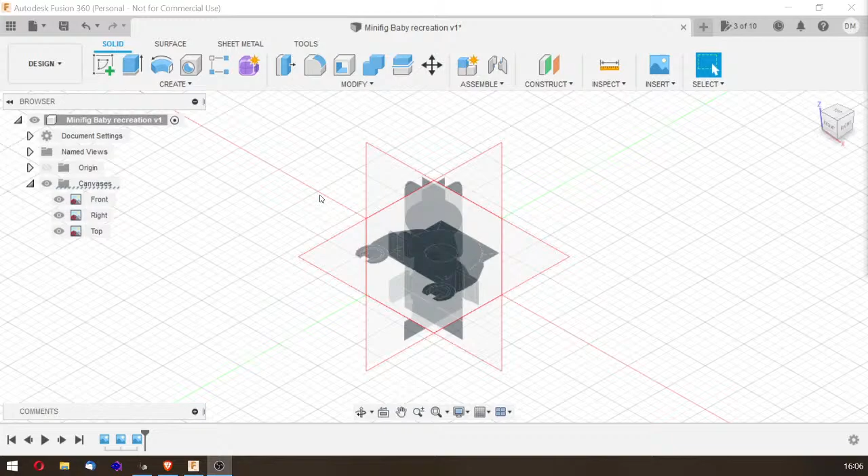I've opened up Fusion 360 and I've set up the workspace to have 3 canvases. The first canvas is the minifigure baby from the front, then one from the left or right side, and one from the top view. These pictures were taken from LDraw, which is an old school program for creating Lego models. It's still around, people still use it, and I use it occasionally, but it's quite technical.

So the model for the baby was taken from LDraw, and you may have seen people design or 3D print models based on Lego objects. What I highly suspect they do is take the models from LDraw, convert them into a format you can 3D print from, and just do it like that.

Now I could do the same thing with the minifigure baby, because my ultimate goal for this is to customize them so I can create my own versions of the baby. The only challenge is that, from my experience, the models don't lend themselves very well to 3D printing, so you have to do a bit of conversion, and then worry about parts fitting as well.

So the goal of this is to create a version that I can 3D print, that I can chop and change as much as I want to, and essentially have something I can customize.

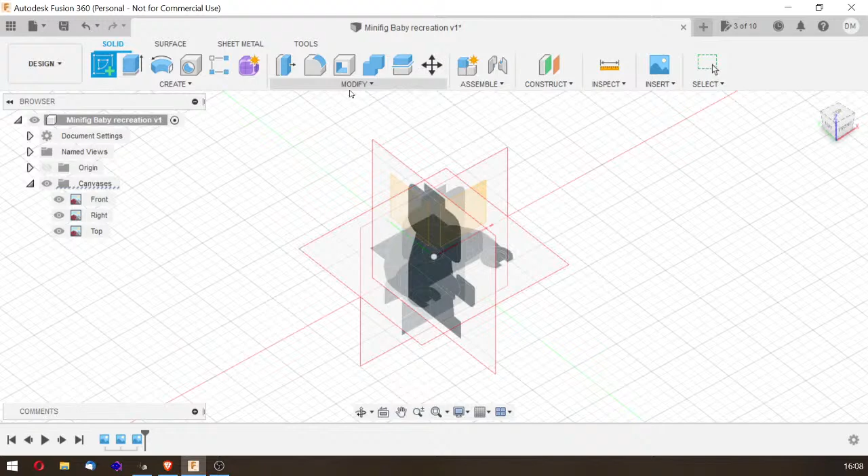So anyway, let's get started. And I have to warn you guys again, as well as being an amateur, this is going to take as long as it's going to take. So feel free to jump out if you have something else more pressing to do - I completely understand, but there's no telling how long this is going to take, because this is my first time doing this.

My strategy is to divide this in half and then mirror what I've created. So I'm going to do one half of the baby, and when I'm happy with it, I'll duplicate or mirror what I've created and go from there.

So what approach am I going to take with this? Well, my immediate thought was to start from the top and just draw a square or rectangle here. The only problem is that if we look on the right or left, we see the body has an irregular shape. So we could create a cube starting here and going up, but then we'd have to deal with the shape of the body and all its angles, etc.

So instead, if I go back a step, I'm going to create a sketch starting from the side here. This isn't a tutorial on Fusion 360, by the way, because I still don't know how to use it effectively. So what I'm going to do is just create an outline of the body, and I'll go through this and clean it up later.

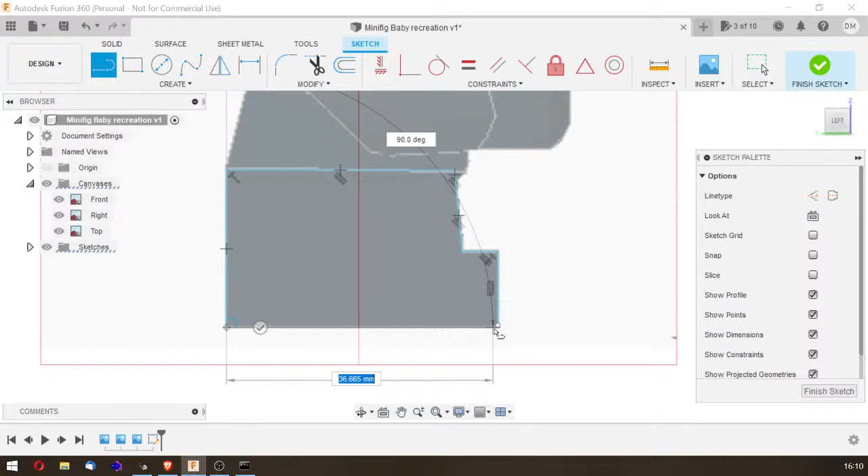So we have a shape here. Now first of all, I want to make sure this bottom bit is horizontal, so I'll select this line and do a horizontal vertical constraint. This symbol here means the line is horizontal, as well as this one being vertical. We want to do the same for this line as well. So the sketch geometry is over constrained - let's see if we can resolve that.

Okay, I think what we'll have to do is get rid of some of these constraints if we can.

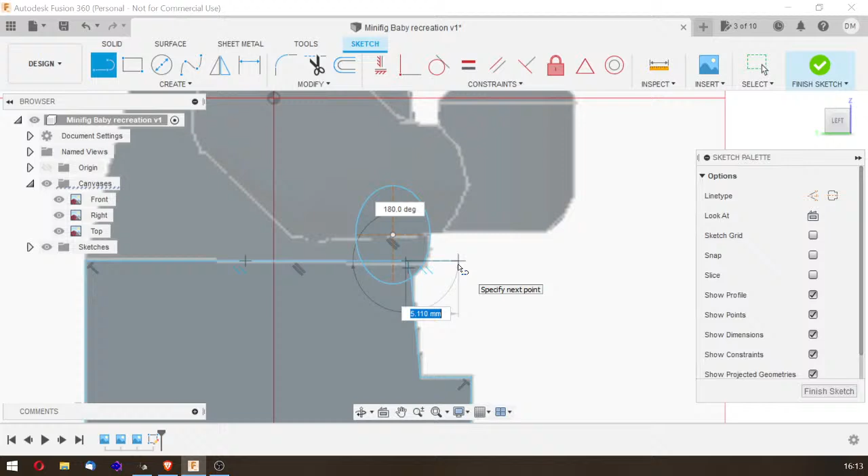So what I'll do is just draw a line there, and then I will trim these lines. Okay, so we get rid of this little bit here, and this line here, so we have the basic leg shape.

So we've created that sketch, and then what we want to do is extrude it so we have one half of the body, or the legs. So we'll go to the extrude tool.

Now we can either go left or right. I think just to make things easy, I'll go right. And we will extend the shape more or less to this edge here, so we'll just have to guess how much it is. I'm just going to use rough numbers for now, and then I'll go ahead and clean it up later.

Right, so if I hide these canvases temporarily, you can see that we have some legs, and that's pretty cool.

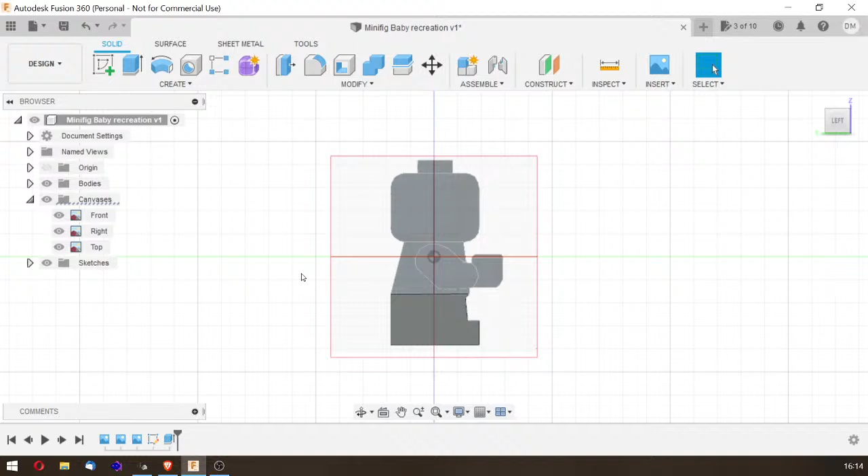Okay, the next challenge is going to be the torso, or the body, if you like. So if you look on the left side, it looks like a straightforward shape here, we could just go ahead and draw the outline similar to how we did the legs. The only issue is that if we look at the front, we see that the torso also tapers, it starts quite wide and narrows as we go up.

So there's a couple of ways we can do this. As I was saying, one way I would tackle this particular issue is by drawing two different sketches and then creating what we call a loft.

So you can see here, that's more or less what I want to try and do.

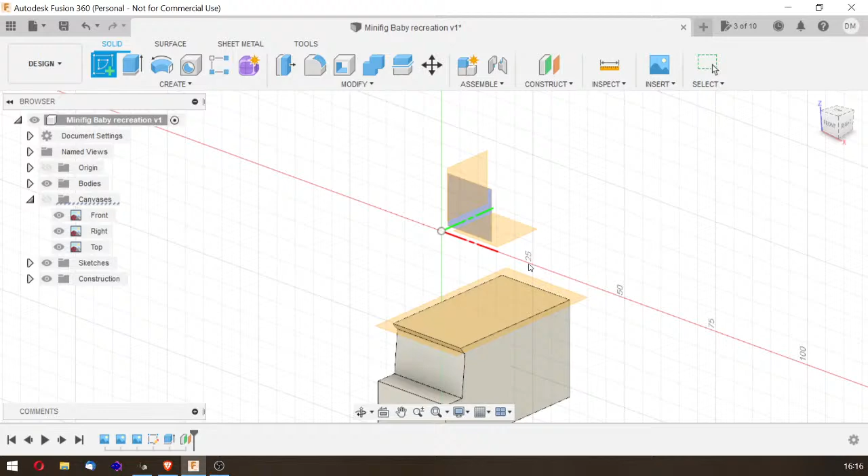Okay, let me think how to tackle this now. If we hide the canvases for just a second, I will create what's called an offset plane, starting from the top of the legs. This essentially tells me where to start drawing from in terms of creating a sketch. So I'll create another one from this plane that I've just created.

And then show the canvases again. So what I want to do in this case is draw the body, or the base of the body, or the torso. So what, let's see.

Okay, so what I want to do is start the rectangle from where the legs stop, and we can do that, so just remember, by taking this selection and creating a projection. So I press P on the keyboard.

Just make sure these are selected. So that makes a copy of all the points from that sketch, or that particular object, and then I can do this. Again, very rough measurements, because it's just about creating the overall shape, and I can go ahead and clean it up later. Let me not do that.

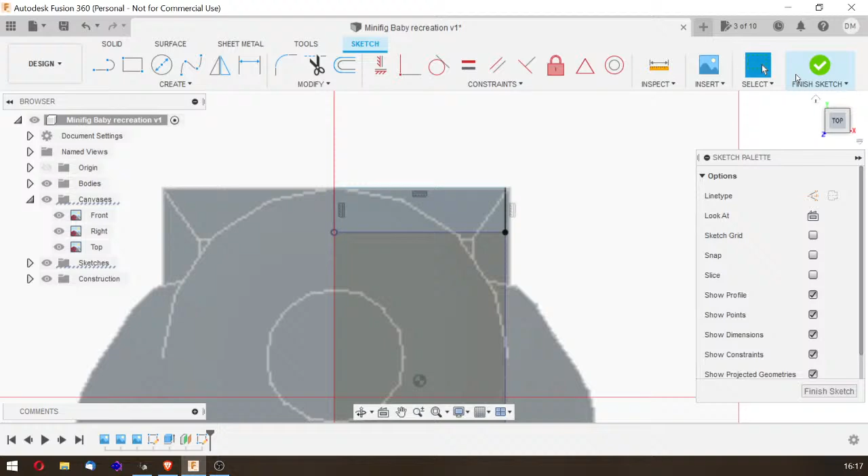Okay, so as I mentioned, I've not done this before, so I'm playing it by ear. I'll just disable these for the time being.

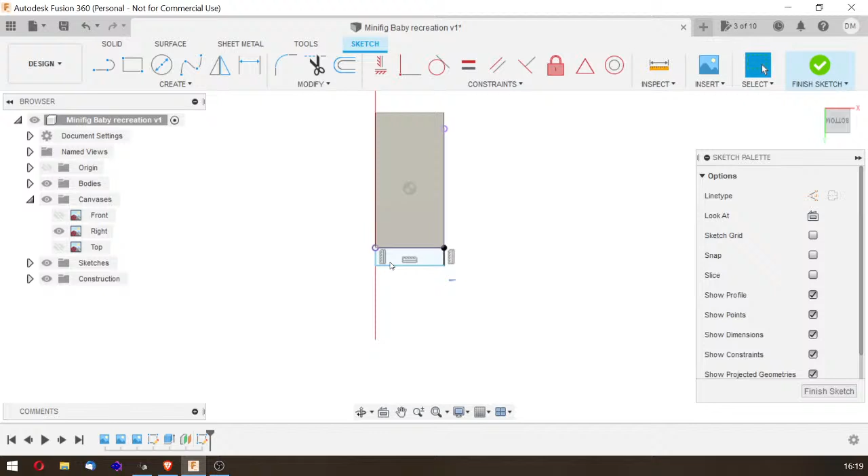Alright, so we've essentially created the bottom of the figure, or the body. Now, why did I do that? Okay, I definitely didn't want to do that. So we didn't need this rectangle that we just drew, we just wanted that area there.

So now what I want to do is create a similar rectangle, but for this part of the body. What I'll do is create another offset plane from this point, and then we can raise it relative to that part to where we want the top of the body to sit. Let's see, I'll just have to guess for the time being.

Now, how do you know man cave isn't my thing? You should probably see where I live right now. Well, it's less of a man cave than a tip, I have to admit.

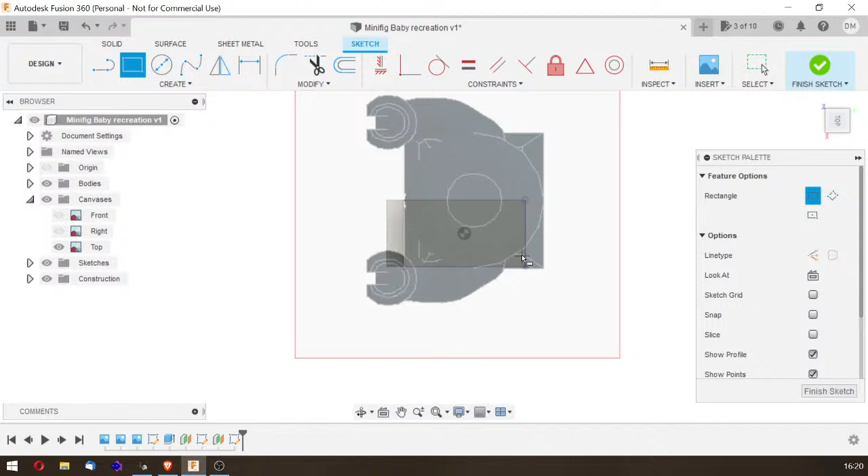Okay, so we're going to create the top of the body, this bit here, and for this I think I'll need the top view, so you can just about see the corners here where we want the body to end. Again, I'm just going to do this very roughly, because I will go back and create some more solid measurements.

Okay, so we have this bit, which corresponds, hopefully... no it doesn't, to the top of the body, and we have this bit which corresponds to the bottom. So I'll just go in and redo this sketch. I've been lied to. I think I see what's happened, I've got a slightly different projection, I think.

Alright, so let me see if I can adjust that. Let me see if I can adjust it somehow. Dearie me, there's always something that goes wrong with these live streams, but never mind.

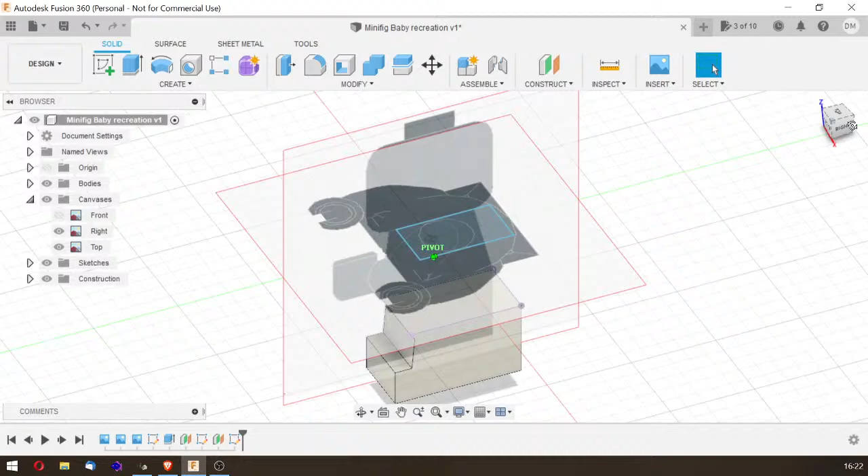You back up to a tape drive. My goodness, they still have those things. Is it cost effective to back up to a tape drive these days? Because I can't imagine you can back very much up to a tape these days.

Okay, this is very, very odd. This is extremely odd.

Gosh, you gave me... hang on just a second. Gosh, just the mentioning of the A and B drives takes me back to the days of floppy disks. Strangely enough, I remember them quite fondly, even though I've gone through goodness knows how many floppy disks. I kind of wish that they were still a thing.

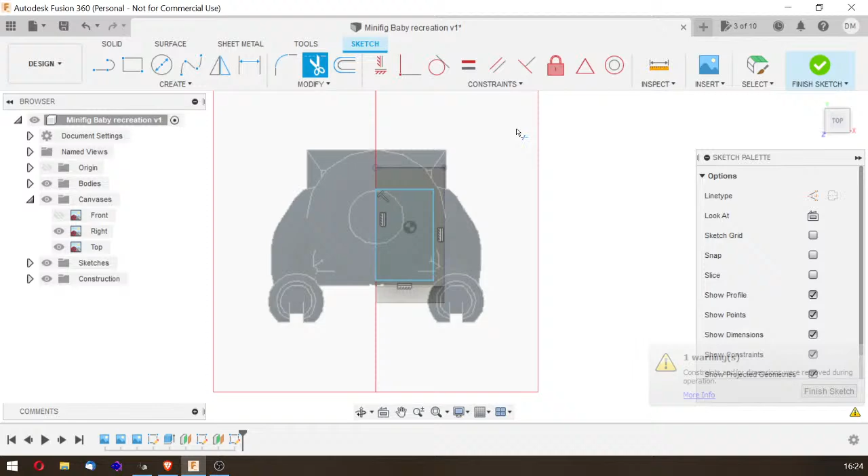Yeah, in terms of backing things up, yeah, I can imagine. I can imagine that for a tape drive, the backup would be very slow, because even at the most basic level, you'd have to rewind the tape, and position it at the relevant spots, etc.

Okay, so this took a lot longer than I'd like, but I've got the top bit here and the bottom bit here. So what I'm going to do is try and create a loft to create the body. Let me just check the fronts. Yeah. Right, so I'll select the loft tool, and we'll start with this, and we will end with this. There we go. So you can see we've more or less recreated the shape of the torso.

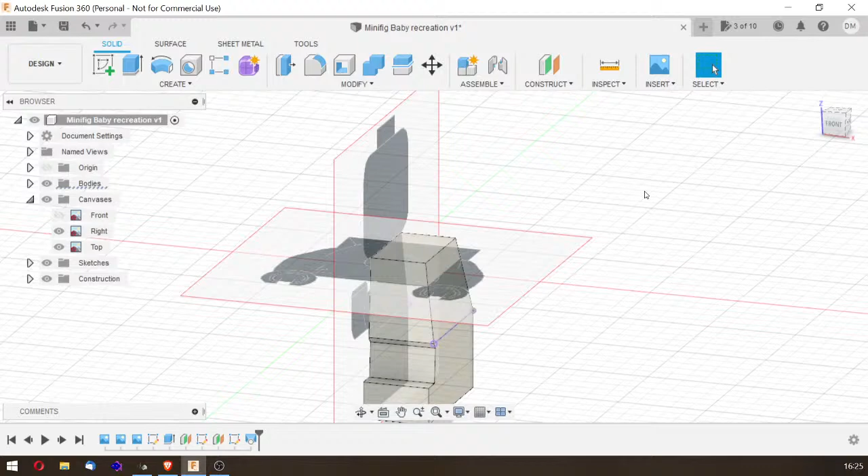Okay, and so we have the body, and it is attached to the legs. Cool. Alright, so what's next? I guess we could tackle the part that I am fearing the most, which is both the arms and the hands. Yeah, we may as well do that.

Okay, so let's show the front view. What we want to do first of all is recreate this hand here. As you can see, it looks pretty much like a cylinder, and then if you look on the side, you can see it keeps the shape of the cylinder, and there's this curved bit here. With the baby, unlike the other minifigures, you get the filled parts - the hole inside the hand is filled. So let's see how we're gonna create this.

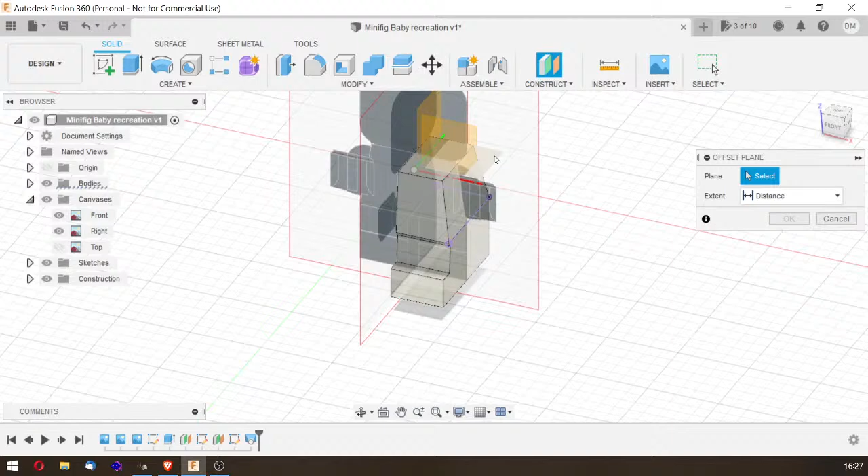We can start by creating a... we could create a cylinder. Oops, let me take a step back, let me hide one of these canvases. What I'll do is create, just to make things a little simpler, a construction plane and have it begin where we want the hands to start, roughly where we want it to start. Okay, let's say there. And then let's create a cylinder. Oops.

Yeah, there is an awful lot, especially if you are completely unfamiliar with 3D modeling. Fun fact, I actually did an animation degree at university, so you'd think I would know about this stuff, except that I specialized in two-dimensional animation. This 3D stuff I never got to pick up, unfortunately.

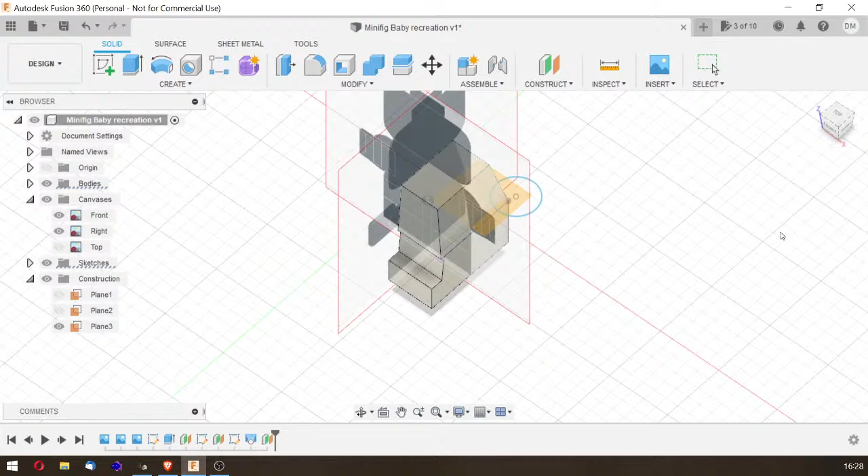I never picked up 3D animation or anything like that, and I wish I had, but at the time there were just no tutorials. There was no real way of getting into it unless you already knew it. I haven't seen anything about train tracks, unfortunately. I've been so far out of the loop with what's going on with LEGO that I have absolutely no idea what's going on these days.

Similar to this, I don't know what I'm doing right now, unfortunately, but nevertheless I must persevere. Right, so I'm going to do it another way, which is creating a circle manually to represent the minifigure hands.

I've got one circle here, and then I'll create an inner circle for the inside. And I guess while I'm here I can create a line which will cut the outer circle to make a basic hand shape.

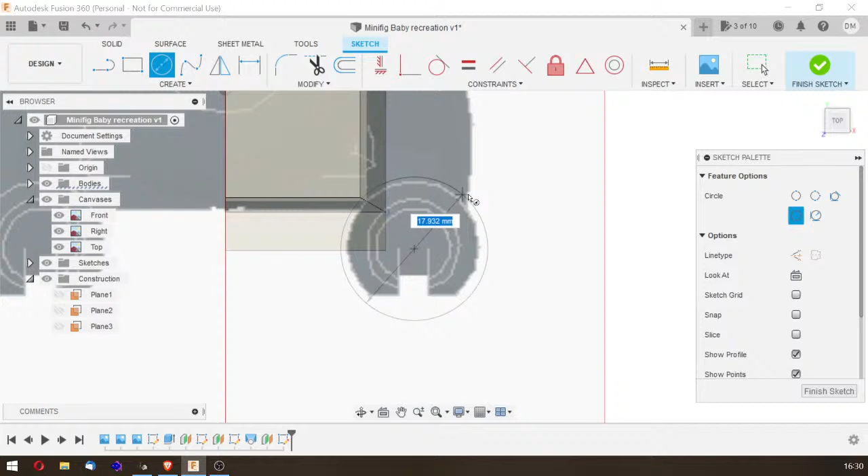But I know a few of the things that have gone on, such as there's a new video theme. I think it seems similar to Dots, except it's supposedly aimed at both girls and boys. That's about it, really.

Sony Vegas 14, that's video editing software if I remember correctly. I've always used Premiere. I've never really gotten to grips with anything else. There was something very similar to Premiere that I used in college, but I've never seen it outside of college, and it's always been Premiere for me.

Okay, I guess it's because I'm trying to do this on a live stream that I just can't seem to get this. Way to embarrass myself. How would I do this if I wasn't on a live stream? Let me think.

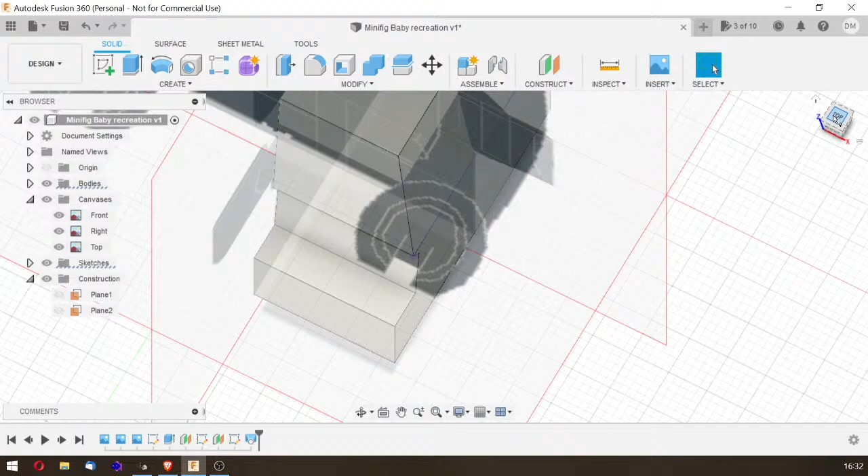Okay, let's start with removing the sketch and removing this construction plane. And let's take a step back and let's get rid of a few of these canvases.

Alright, so we have the body and we have the legs. We still have to build the hands, we still have to build the arms, which is even more difficult than the hands, by the way. We have to build the head, which is going to be fairly, well, certainly compared to the hands and arms, comparatively easy. And then something to join the head and the body together.

So I do want to tackle the hands because that will make doing the arms hopefully that little bit easier. So let's try hiding the body first of all. Let's remove as much clutter as possible, and let's go to the top view.

Now let's try this again. Oh, well, what are these? Okay, let's hide that sketch. Alright, let's do this then. Let's create a sketch on this plane. And let's pretend there's nothing else here. We are just interested in creating a hand.

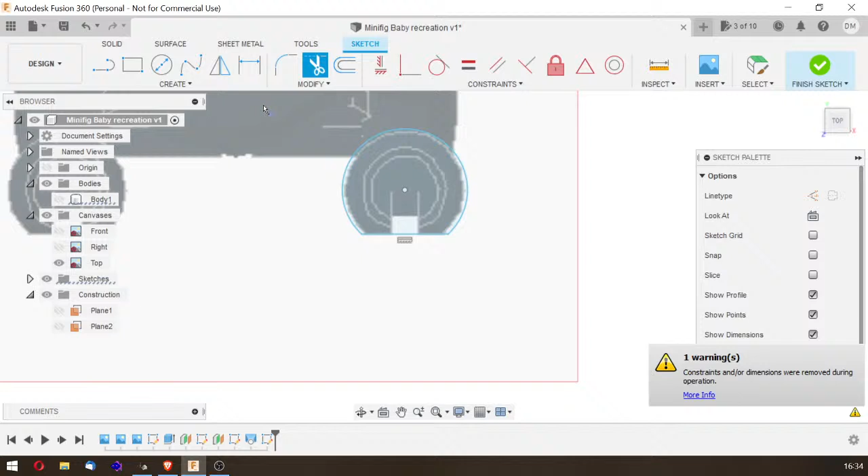I would say that this is one of the areas where relying on, in this case, LDraw geometry can easily trip one up. I have to remind myself, as with just about any other project I've taken on, I'm not trying to recreate something exactly like LEGO. That's a really important thing that I would recommend other people remember. It's not about trying to recreate something exactly like LEGO, unless that's what you're actually trying to do, in which case good luck. This is about creating my own version of something.

And if I remember that, it makes things a little bit easier. Okay, so we've gotten this far, that's cool.

What I want to do is create a rectangle that's aligned perfectly in the middle of this point here and this midpoint here. So what I'll do is create what we call a construction line, starting from this point and bisecting that line here. So what I should then be able to do is create a regular rectangle, remembering to deselect construction, start from here and then just cover that hole there. Cool. And then I will just trim these lines because we don't need them now. Alright, so that's a basic hand shape.

So hopefully we should be able to make what looks like a hand from that. Let's zoom back out and have a look at the front view.

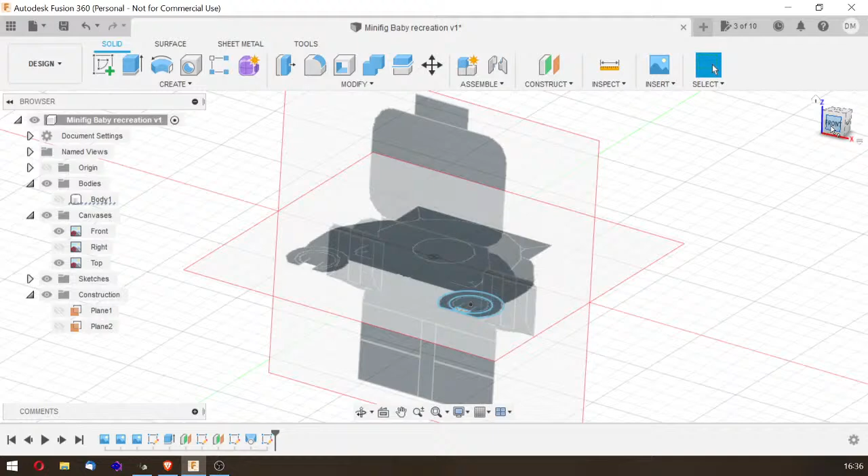Alright, so as you can see, that's where our sketch is, and we want to create our hand. So we could start by selecting both of these shapes, the inner and outer circle, and extruding them in one direction to get a rough hand shape.

I'm going to reduce it to, let's say, lucky 13. That looks about right. Okay, so if I hide the canvases, that's what the hand looks like at the moment.

I think next what we want to do is create an indent at the top of the hand to make it look a little bit more like what the baby's hand looks like. So we select this inner circle, and instead of extruding, which should look like this, we would cut into the shape, but not nearly by that much. I'd say maybe two. These are millimeters, by the way, but again I will modify the geometry later.

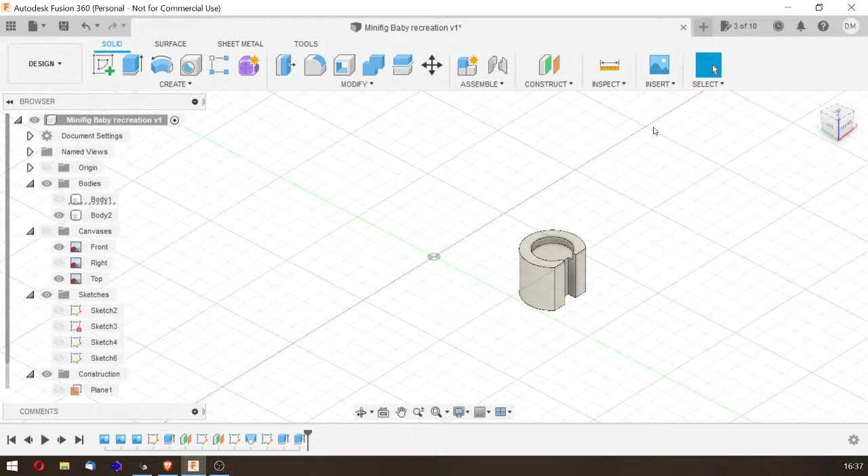So if we hide the sketch, you can see that we've cut into the shape, which now looks a little bit more like the minifigure baby hands. I'll just fix that there we go.

Okay, so one more thing to do is that, if you remember, the hand is slightly rounded here. So hopefully we can replicate that by using the fillet tool. So what we could do is select these edges here and just play around with the values until we have something we're pleased with. Let's have a look on the left. That looks pretty good. What does the sketch look like? It's fairly similar, I think.

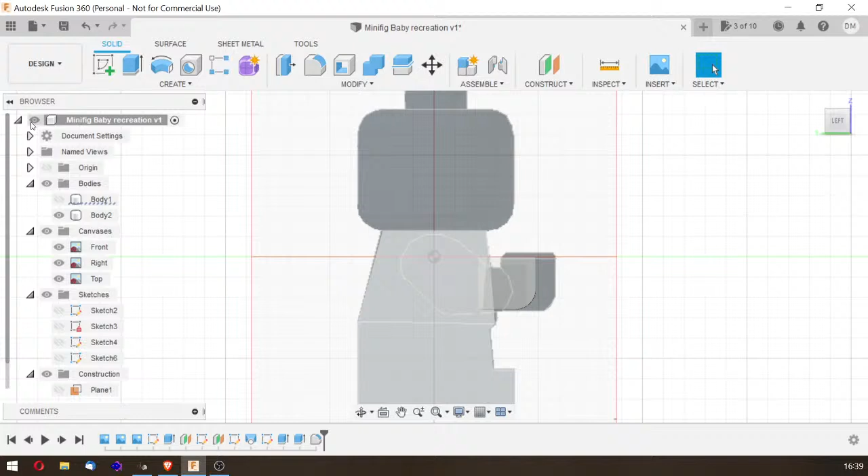Can my mic pick up a cop car in the background? Well, you know what? I have such a quiet voice, and I'm told that somebody could be screaming on the other side of the road from outside, and you could probably hear them a lot better than you could hear me. But this is a rather powerful mic, a fairly decent mic. So it wouldn't surprise me at all if you could hear other sounds. As far as picking up broadcasts, which I guess is what you're asking, I don't think so. My microphone is just a microphone. I don't think it can actually pick up radio waves or anything like that.

Okay, so where are we? We have what looks like a minifigure hand now. If I just hide these canvases and show the body, this is what it looks like, but whoops.

We also want to adjust the position of this hand so it's more in line with where we want it to be. Right, so if I hide the top and the front, move to the right hand side and select the move tool, we can select the hand and shift it more or less to where we want it. That's pretty good actually.

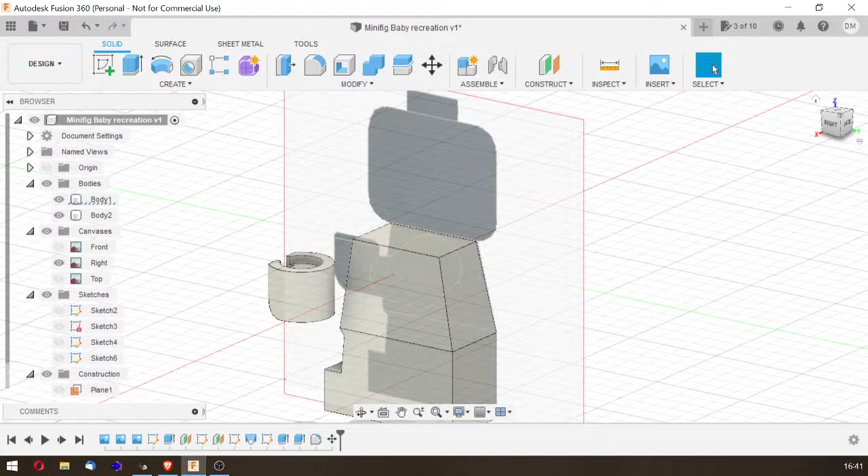Alright, so where are we? We have the body, we have the legs, and we have the hand, and now this is the bit that I've been dreading, the arms, because this is where I tend to fall down with 3D modeling. How to make the arms that look like arms. Oops. Why does that happen?

Okay, so I did have a play around with Fusion 360 before this started. I've been thinking all weekend about how I'm going to do this, and I guess one solution is to use this tool, which is creating a form. And this is entirely experimental. This could go horribly wrong. As a matter of fact, I'm expecting this to go wrong. But what we could do is create some forms to represent the arm, to give it a slightly organic shape. So let's give this a shot.

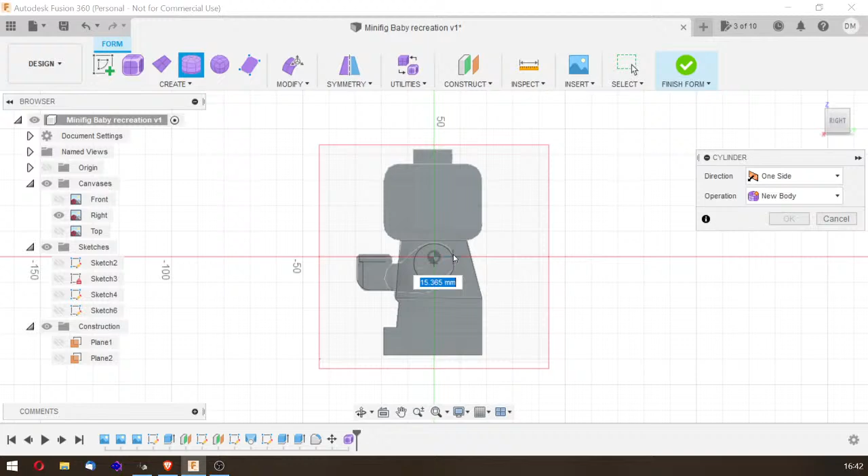Right, so what I'm going to do is create a cylinder, or perhaps even a series of cylinders representing the arms. So I started with the midpoint of the cylinder, starting from the side, defining the diameter, and now I guess I'll define the length, if I can have this rotate the right way. Okay, so we want the length of the cylinder. Let's go to the top view and look at the top.

Yeah, I have to bear in mind that the top seems to be misaligned with the rest of the body. I'll reduce the number of segments or height faces.

Okay, so are we saying that my microphone can pick up a police car in the background? Well, if it's got its sirens on, then certainly it can pick up noises from outside. I guess I was thinking in terms of anything that happens on the police radio. I don't know about that, and I'm not sure if I'd want that to happen, to be honest.

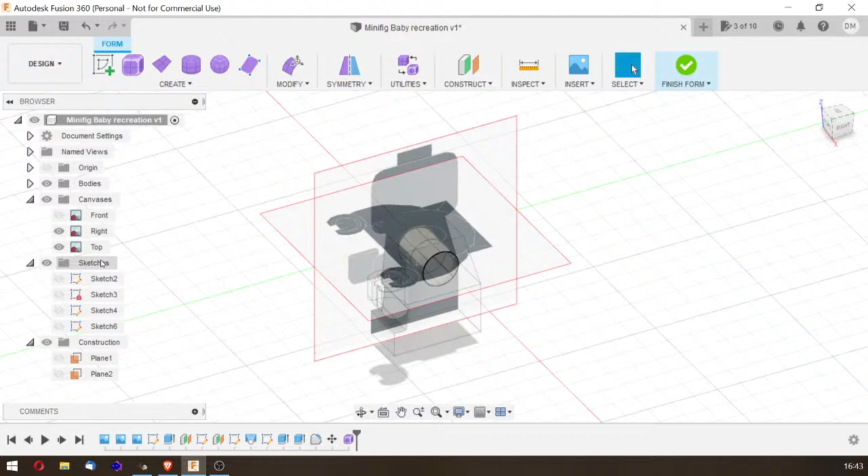Anyway, we're still in experimental mode here, so I am thinking about how to create this arm. Okay, so we started with this cylinder, and I've gone down this route because we can then manipulate the shape by, let's say, selecting the edges, going a bit closer, selecting the edges and going to modify. It looks a bit of a mess at the moment, but we can scale this edge. This is vertical. This is horizontal scaling. Okay, we can rotate.

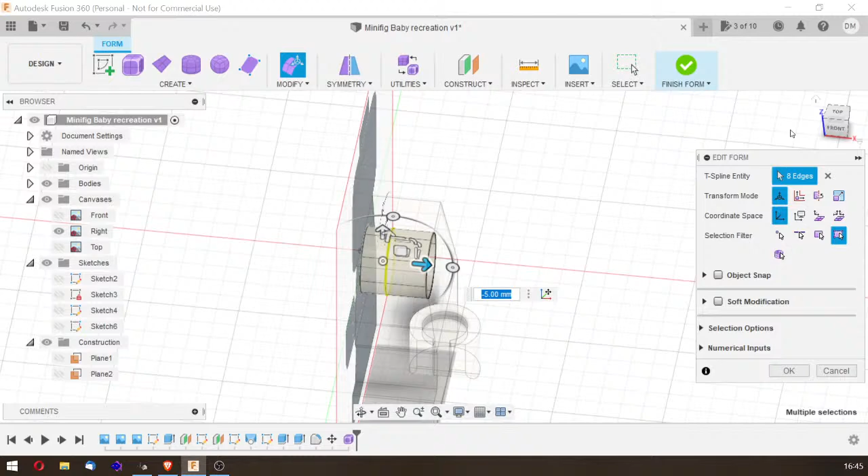We can do a little bit of manipulation. So I'm thinking perhaps use a combination of these to build our arms. Now, which combination, I have absolutely no idea, but we will persevere and we will get it eventually.

Alright, so I'm just going to play it by ear because the LDraw screenshots are a little bit misleading, unfortunately. So what I'm going to do is have this bit of the arm extending from the body, and then what we probably want to do is turn it this way. We'll begin turning it this way somehow in order to create the bend. But instead what I'm going to do is say push that back, and let's see what else we can do with this.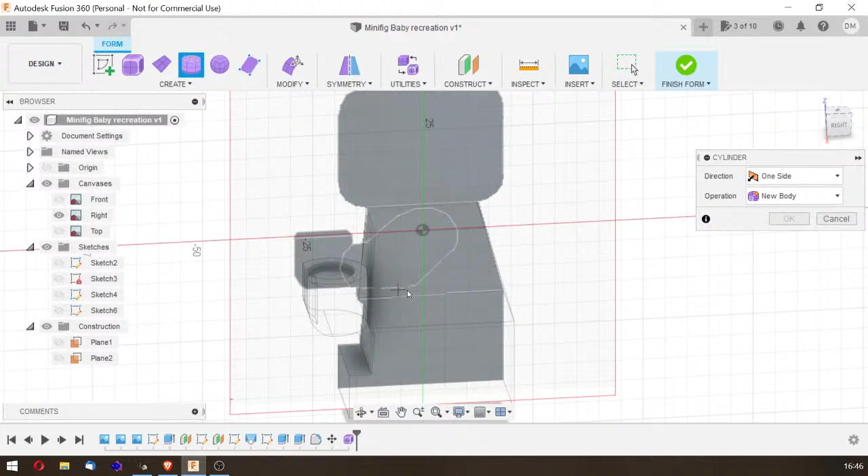Okay, let's start again with this. Let's try doing this again. So I'll get rid of that and I'll create a form. So what I'll do is try a cylinder from, I'll try one starting from the side and then one extending from the hand, and then perhaps look to join both of those at some points.

Well, while we're on the subject of picking up sounds, and you know, I appreciate you guys are still here. I can only imagine how boring this is. How good would you say your hearing is? Just out of curiosity, because...

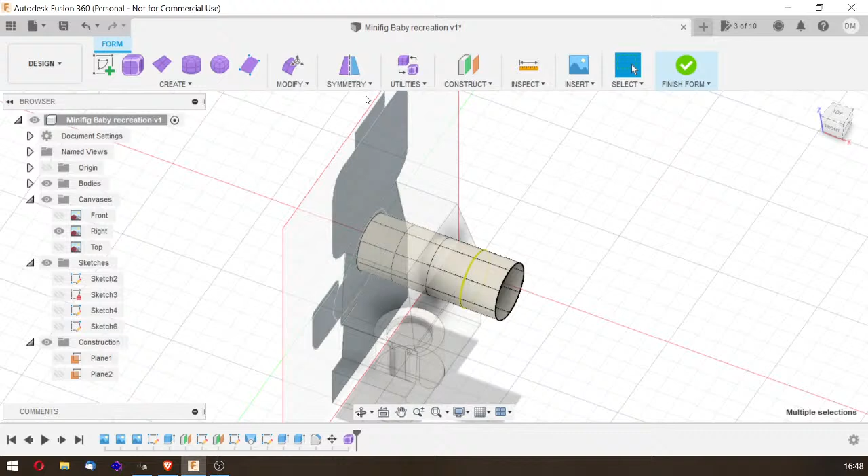I would say that my hearing's not very good, although it's more the case that I have difficulty concentrating on certain sounds rather than having bad hearing. I'm not sure if you guys know what I mean. So I've usually had issues when I'm out and about. If I'm in, let's say, a busy club or a bar or whatever - not that I usually go to those things - I have a hard time concentrating on certain sounds, I suppose. Keeping track of conversations and things. So in that sense, I would say that my hearing is not very good.

Okay, well, Kerry J, I envy you. That's all I can really say. I envy you for having very good hearing.

Okay, so dare I say it, I think I'm getting somewhere with this arm. I don't know how this is going to turn out, to be absolutely honest, but this is looking rather interesting. So I'm literally just playing around with the shapes at the moment, trying to resemble something looking like a bent arm. But the good news is that once and if I'm able to get this shape, then it's more or less plain sailing from here.

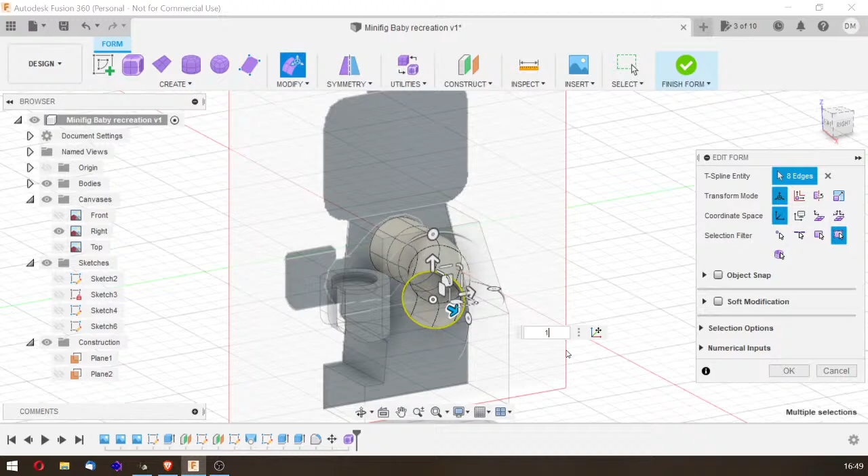Gosh, it makes me wonder how quickly people at LEGO are able to make these shapes, because I'm having a heck of a time trying to do it myself. I suppose, mental note for myself, before announcing a live stream that I'm going to be doing this, I'd better get some practice in.

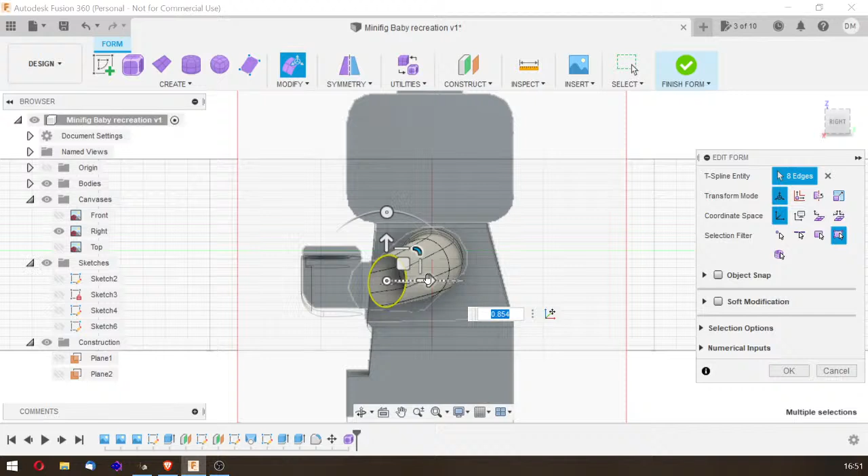Now that's an interesting thought, and it's probably beyond the scope of this live stream, but it's interesting that you say that you're raised to value silence, because from my experience, and I'm pretty sure some of you can attest, it's actually the opposite, that loudness is valued. You'll actually be criticized and, for lack of a better term, crucified for being quiet, and that's whether you're a male or female.

I've actually had a very interesting conversation with somebody a while ago, saying that it was frowned upon for a female in particular to be loud. I think that society generally values... actually, I don't think it makes that much of a difference whether a woman or a girl is loud or quiet. But certainly the idea of being loud is seen as masculine, and so men are expected to be loud for whatever reason.

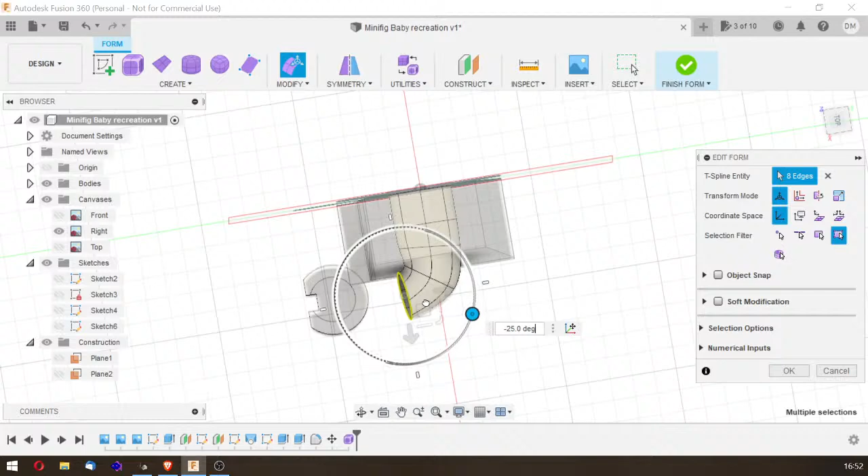I've certainly had issues with being soft-spoken myself, as some of you know. It's certainly been a challenge, but it's also something that, on a personal level, I have learned to embrace. You know, rather than trying to fight it, try to find ways of working with it. That's been my general thought.

But yes, I should definitely practice this before I get on a live stream and bore you guys to tears with this.

Okay, I'm going to see if I can... let's see, try creating another cylinder somewhere else. Okay, I'm not sure what... oh. Okay, never mind.

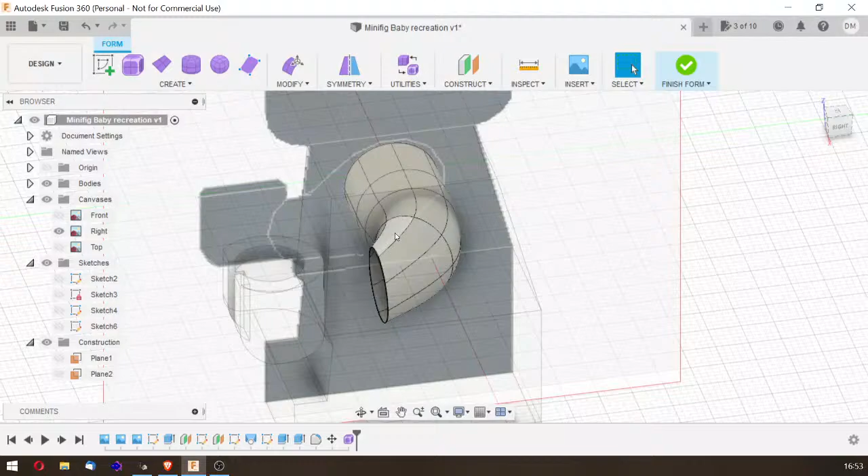I'm just thinking, is there a way of extending this part of this cylinder to make it meet the hand? Okay, extrude, that helps, I think. Nope.

Yeah, I'm just trying to think of what I can do. So I thought maybe I could extend this part of the arm, but it doesn't appear as if I can. So I'll just have to improvise.

What would silent mode do? Okay, so what silent mode would do is you would just say to heck with perfection. Just try and get the results that you want.

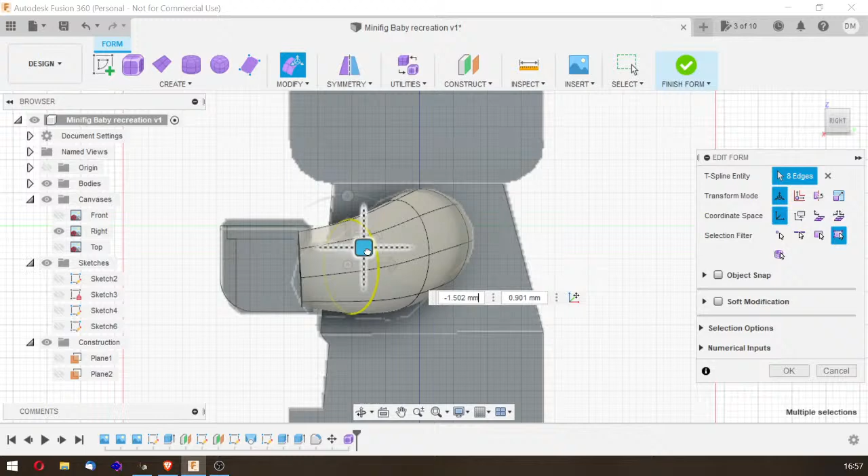Well, I gotta say, I'm getting on myself. I gave up referring to myself as young when I... heck, I may as well mention I'm 38 now, I'll be 39 this year. I gave up calling myself young when I reached 35. You know, I often hear from people, it's all downhill from here. And I certainly found I'm not as youthful as I used to be in any sense of the term, but I also think that it's as much to do with what I'm doing.

Yeah, 53. I suppose this is why I'm emphasizing this year, at least, doing more.

You know, I want to. You know, I've spent so long, I guess, procrastinating, not doing as much as I could in terms of projects and things. And this year is essentially about coming out of hiding and doing a lot more in terms of actually producing things.

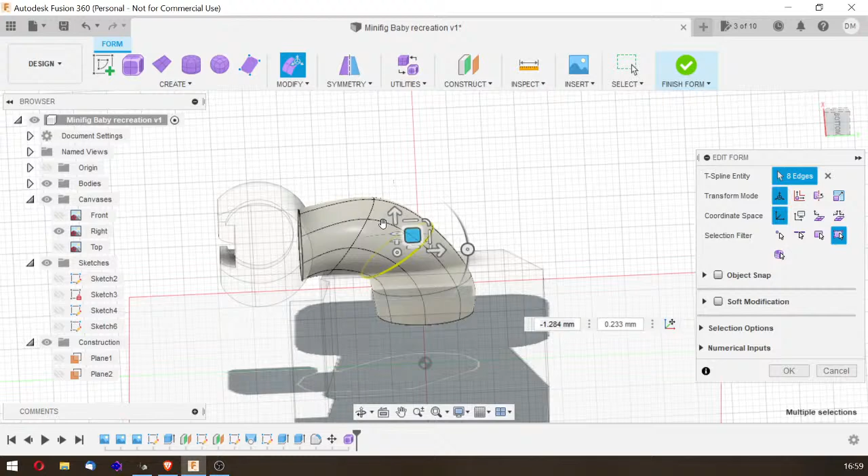Just thinking about the last live stream I did, where I mentioned the Lego fan who's no longer with us. I guess none of us really knows how much time we have left, so it's important, to me at least, to do what we can to make our own contributions. And for too long I have been in hiding because of various things, and this year I wanted to put a stop to that, hence why I refer to this year as the year of the mode. It's my comeback here.

So yeah, I'm literally just playing around with this. I have no idea what I'm doing or how this is going to look. Just trying to create a semblance of an arm.

Again, I have no idea how the people at LEGO do these things. I've got no idea how anybody actually gets into 3D modeling, or how they did when I was starting out in animation. I literally couldn't find any tutorials on it that made sense back then.

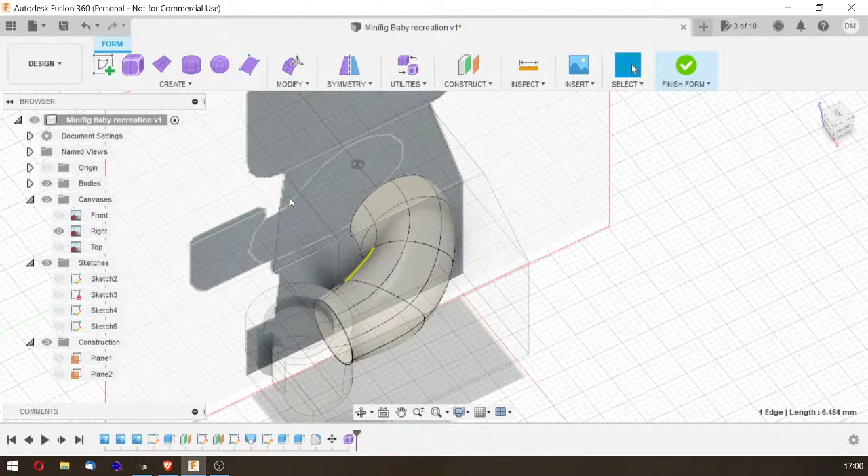Alright, so for the sake of time, I'm going to go with this for the arm. Let's see how this looks. If I hide the canvases, that doesn't look too bad actually. I don't think that looks too bad. What do you guys think?

Okay, there's a little bit there where I suppose we could just shift the hands. Oh no, we could go in and correct that shape. I'll do that. We could move this forward.

Thank you, Kerry. You don't have to say that, by the way, but I appreciate that.

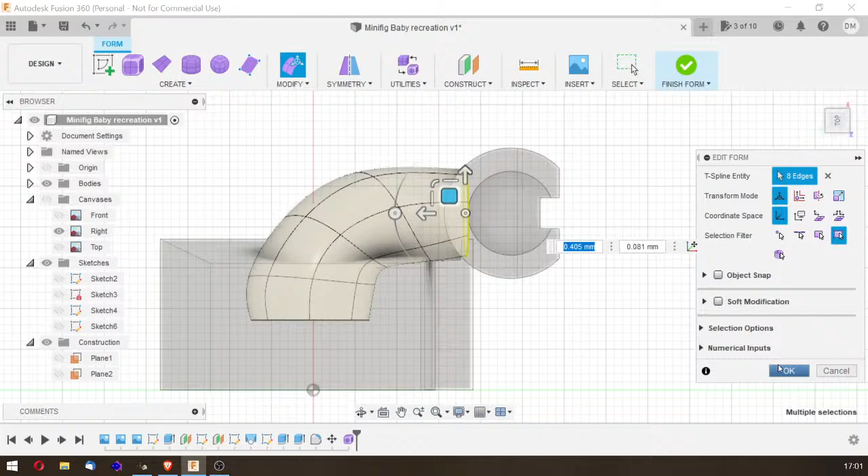I do have a number of similar projects like this on the go, and I can't wait to show you guys what exactly I've been creating. It's just that I have to be rather secretive right now, just because of everything that's been going on.

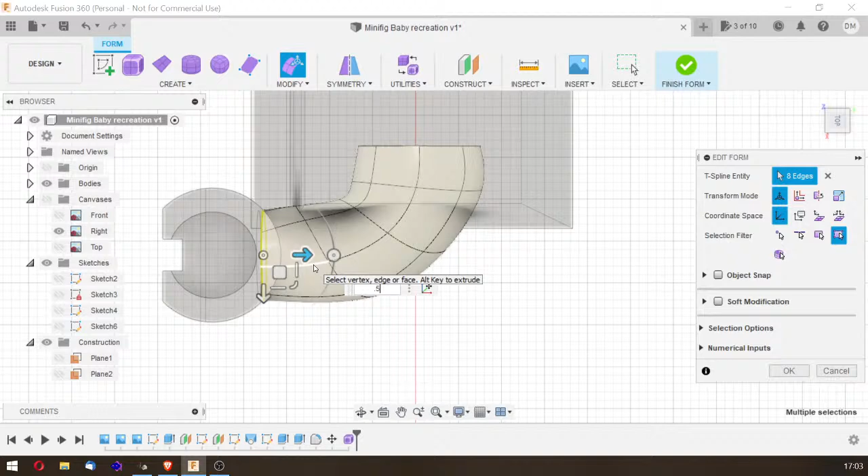You have an e-bike. Let me tell you something - I don't know if you guys remember the hoverboard craze. This was a few years ago, back when hoverboards were relatively new, and I think they cost about £600. I was almost tempted to get one because I was too lazy to walk, and they seemed rather cool at the time - I could imagine myself just scooting down the road with one. But a couple of things prevented me. First, they were expensive. Second, they were actually illegal to use in public - you could only really use them on private land, which kind of defeated the purpose. Third, you had to be under a maximum weight to use them, and I was, let's just say, above that weight. And the fourth thing was the notorious stories about them catching fire, and I certainly didn't want that.

If I knew how to ride one of those things, I would probably go for an e-scooter - I think those are quite cool. An e-bike would be cool too, if I knew how to ride a bike. Sadly, that's one of many things I never picked up when I was young. Although quite recently somebody did attempt to give me a basic lesson in how to ride a bike, which is very generous of them.

But I think with everything that's going on right now, it would be a very good time to learn how to ride a bike. That should probably be one of my goals for this year.

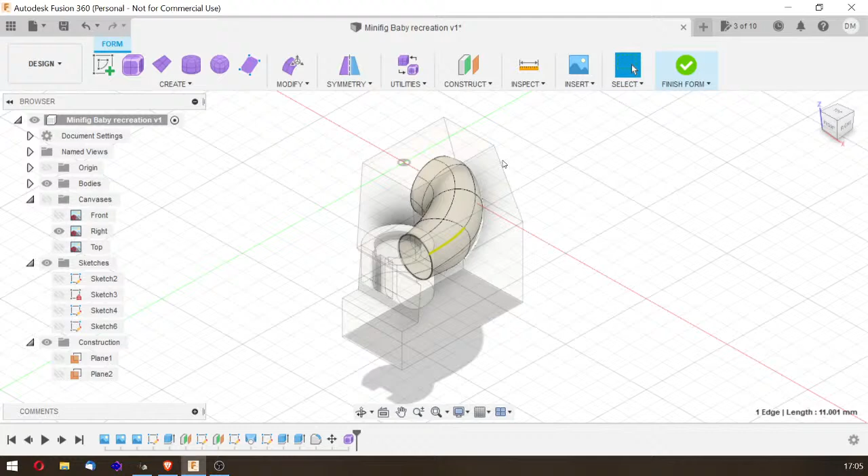Okay, so we have kind of what looks like an arm, I suppose. I've just noticed something with the hand here which I want to go back and correct, if I may. If you look closely, there's a little lip, although we can actually correct that using the chamfer tool to make it look a little more attractive. This is something I can adjust at later points. And while I'm here, I may as well do these as well.

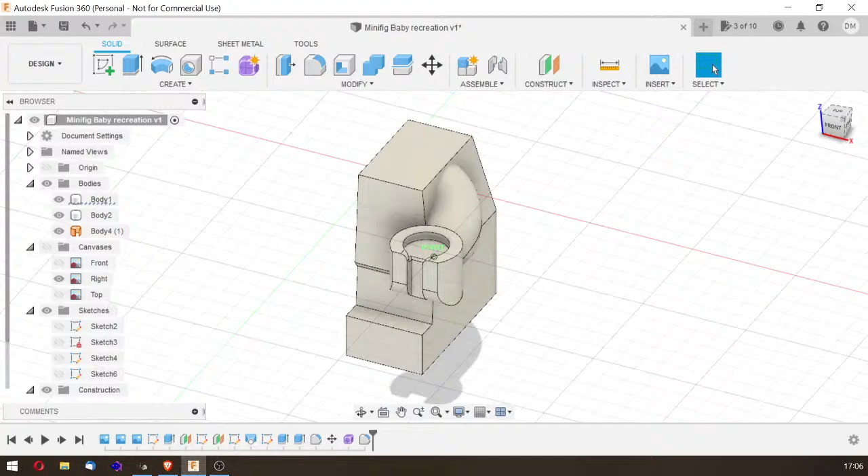I suppose that's one of the downfalls of owning any vehicle - there's so much maintenance. I don't drive, I don't have a car or a bike or anything like that, but the closest thing I could relate it to is a 3D printer. There's so much maintenance that has to go into those things, it's unbelievable. So one would think you're getting a pretty good deal with the prices of today's 3D printers, but if you don't like tinkering around with them, then it's probably better to invest in a more expensive model. I'll just say that much.

Okay, so what do we have? We have the legs, we have the torso - both joined together. We have the arm and we have the hand. So I've created just one half of the baby, and what we're going to do is create the other half by mirroring these bodies.

So I'll select the mirror tool from here, select bodies - I'll select all three of these - and then select the mirror plane, which I think is the y-axis. And just like that, we've created a symmetrical body.

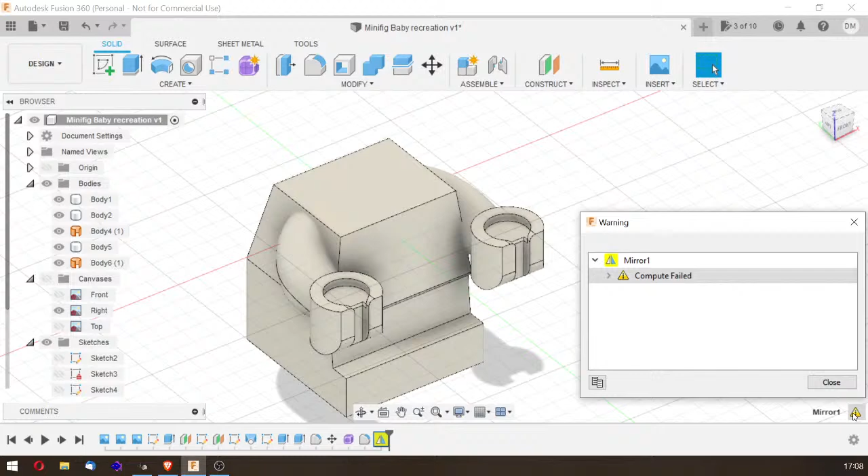What's this warning here? Compute failed, could not join bodies. Okay, that's fine. So at the moment it kind of looks like a fat baby, to be honest.

So this is usually how, if you're familiar with 3D games, certainly the older kind of games, they create the texture maps for 3D models. They basically design one half and then flip the design to create both halves, so essentially they're symmetrical.

But there's a tiny detail missing from this figure, and that's the indent between the legs - there's one at the front and one at the back as well. So before we continue, let's take care of that. If we go back one step, before we create the other half of the body, we can create a sketch at the very bottom where these feet are, and essentially create some shapes representing the indents.

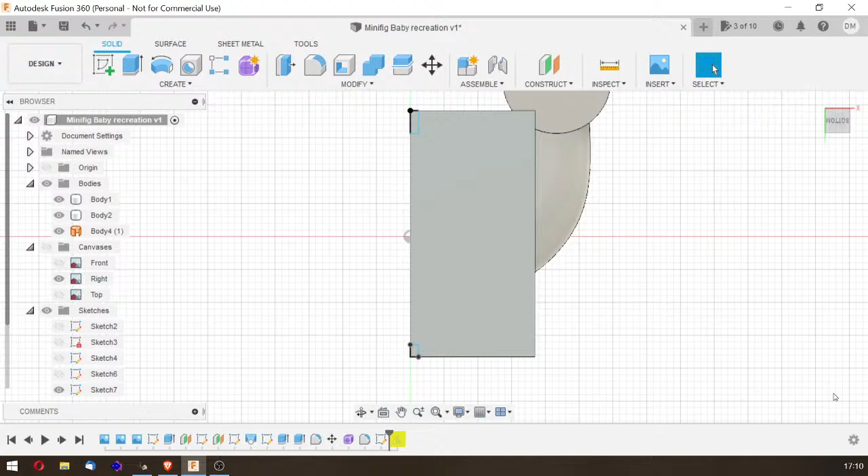And then we want one for the back as well, which is not going to be as large, but it will serve a purpose. Okay, so with those shapes...

I'd imagine so, Bob. I'd imagine so. But I'm just thinking about how they design these parts. There's a lot of curves and intricate shapes usually. Even the most simple parts, I'd imagine, are very complex to design.

Right, this indent here, I want to go a little bit further in. I'm just looking at one I made earlier. Yes, let's go back and edit this sketch.

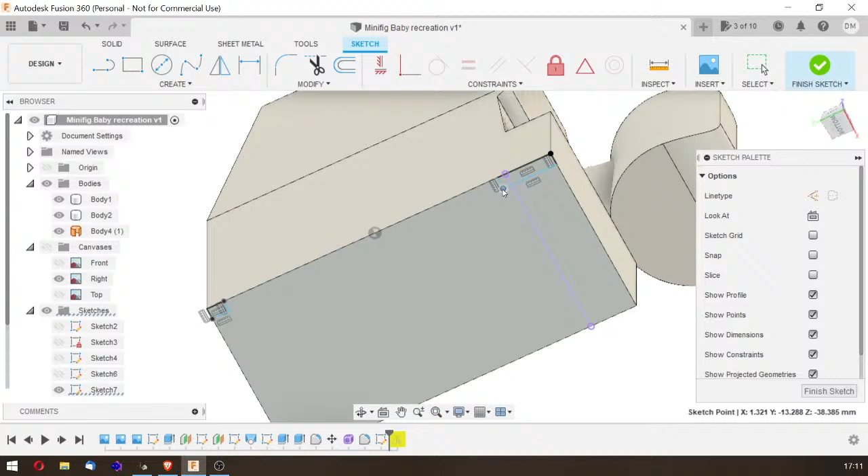So what I want to do is project this line here onto the sketch so we know where the feet end, and we can use that as a reference for how much of an indent we want for the legs, for the front part of the legs at least.

Actually, we could use this line as a reference as well. Okay, so that's pretty much spot on. Okay, so from there what we do is...

Did you guys hear that? That was a police car. Oh no, I think... actually I can't say if that was a police car or an ambulance.

In any case, what we do is we take this first indent and we can cut into this shape, and I'll make it go to... oh no, that's not right. We can make it go all the way up to here.

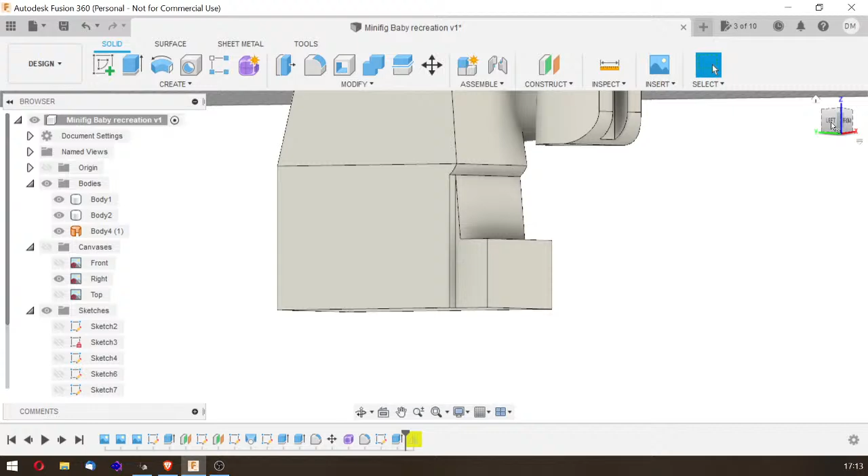And that's a very crude indent. But if we take a step forward and go back to the mirror, we can see there that the shape's been indented. Whoops.

So let's go back and do the same for the back parts of the leg. Okay, I think that will do.

Excuse me. Again, very crude, but you can see, okay, that may be a little bit too deep. So we can go back and edit the sketch to make it less deep. That's the beauty of Fusion 360. We can go back and change things if they're not to our liking.

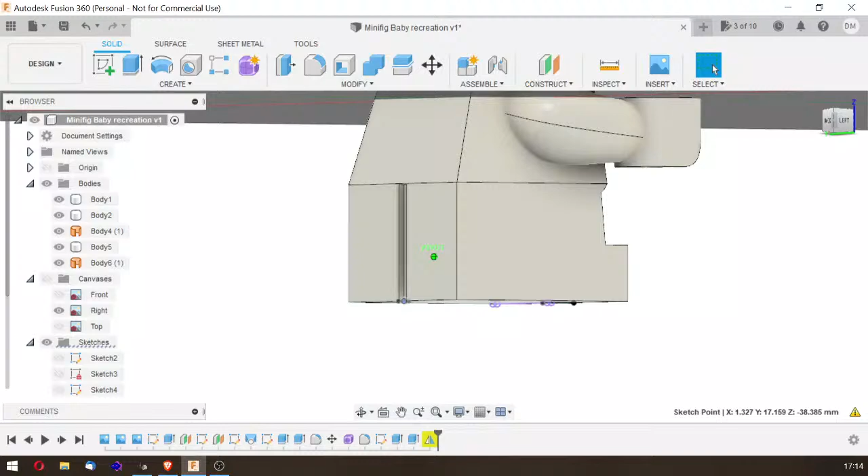Right, so there we can see we have an indent to represent the legs, from the back and the front. That was me, yes, that was me.

The fun fact is that there are no police cars, no ambulances, fire engines, etc., at least in my area anyway, until I do a live stream, and then they all come out at once. That's an undisputed fact.

Alright, so now we're going to create, before we create the head, we're going to create the neck connection. So we're going to draw on top of the body. We have the middle points here already. This is the middle point of the entire document, so that's a nice reference.

And then we can make the neck joint as big or as small as we want. Of course, it has to be smaller than the head, but it's a simple circle from here, and then we can extrude it to create the neck, just like that.

Okay, so it took us a while to get here, but this is essentially the body of the baby, and I'm going to save my progress here just in case, and I'm going to call it crude baby body.

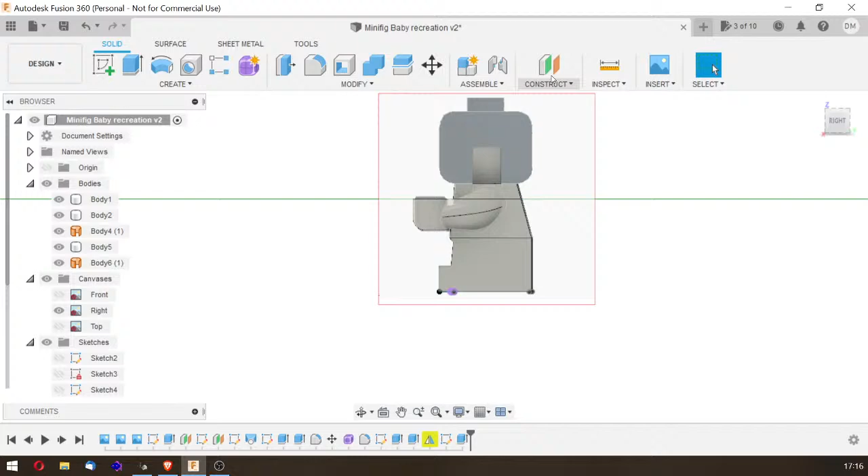What I'll do to make things easier is create a construction plane on top of the baby's body, and this is where we'll start the sketch, and then we can begin another sketch using that plane, and then we can draw a basic circle.

And we can create it as big as we want, because some babies have some really big heads, as I'm sure some of you can attest. But we want to, for this example, just try to match it with the sketch.

So let's go to the right hand side and let's see if we can make it a little bit closer to what we have. Let's say 36. Nope, that's a little bit too small.

We want 37, that's maybe a little bit larger... 38. Okay, so that's the diameter of the baby's head.

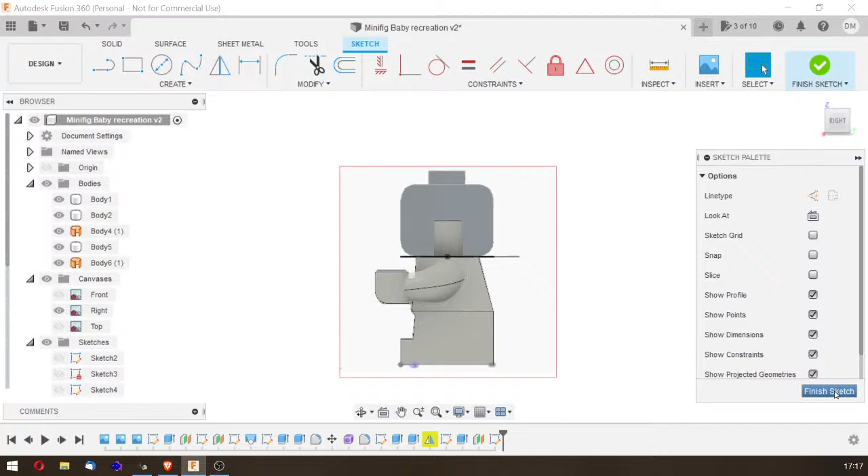To create the very basic shape of the head, we just extrude. We want to create a new body because the head is a separate component, and we want to extrude upwards.

And that's pretty good for a snapped height, so we'll use that.

In more than one sense of the word, I would say, Bob. In more than one sense of the word. But no comment from me in that regard.

Okay, creating the stud on top of the baby's head is a very similar process. I'll just use a rough one here and very quickly extrude upwards. Again, you can make it as tall or as short as you want. I'm going to make it, let's say, 5 millimeters.

That's fine. And then to get these rounded edges on the head, we use the fillet tool again. So this one will make, that's pretty good, 5 millimeters. And we'll create another one for the bottom, I think it's a slightly smaller value.

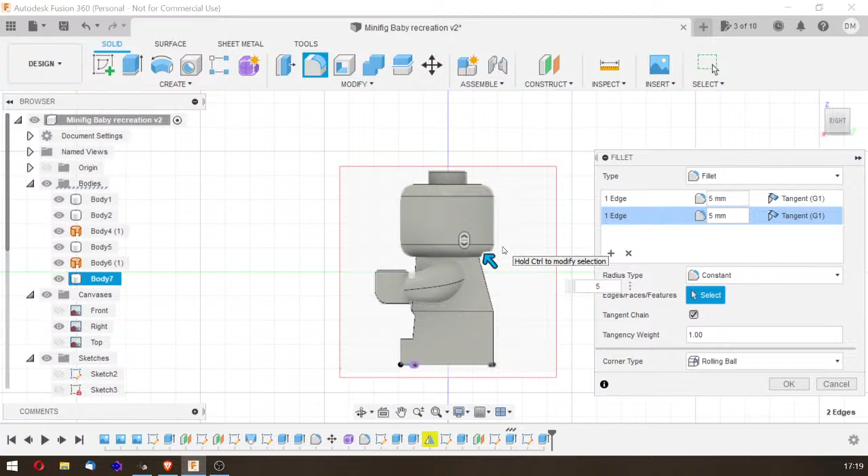That was pretty much the same. And that is the head, and that was comparatively painless.

So here we have what is meant to be a baby, a minifigure baby. But we can't stop there. We want to make this a model so we can print as many copies as we want and customize them. So there are a few more things to do before we can do so.

First of all, we've got to save it, otherwise we risk losing everything. And if we lose everything, by the way, we'll have to start this live stream all over again. And I'm going to make it to where you guys can't leave. How about that?

Okay, so there are a few things we can do from this point on. First thing I'm going to do is name this particular body the head, just so I know what it is. And this body here is actually the body, so I'll name that as such.

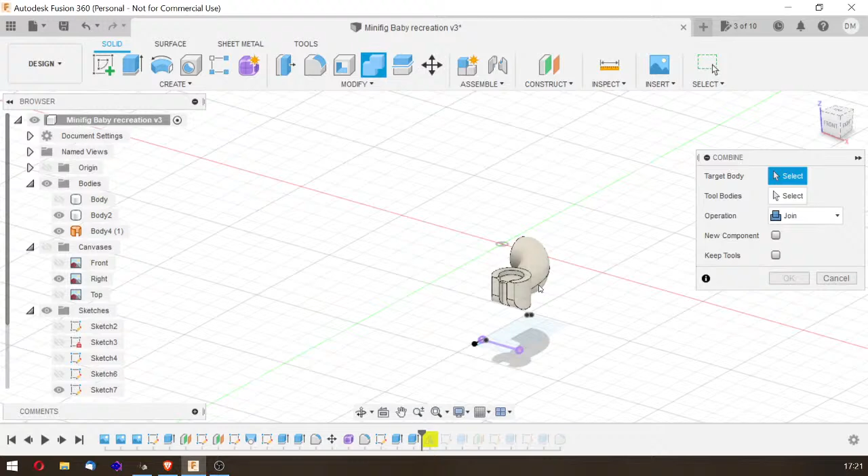What I'm going to do is go all the way back here in the timeline, and I'm actually going to create a single body, or component, from the arm and the hand. So first I'm going to join, I'm going to attempt anyway to join the arm and the hand together so they're one piece.

I think I'll have to do something to this form before I can join it to anything. Sorry, okay, so just give me a second here.

What are you planning to open, Bob? Is it a shop, or what are you referring to when you say you're going to open one day? Just out of curiosity.

Right, so at the moment I'm trying to figure out, and I must have missed this part, how I'm able to join this particular thing, which is a form, to the hand. There's got to be a way of doing it somehow.

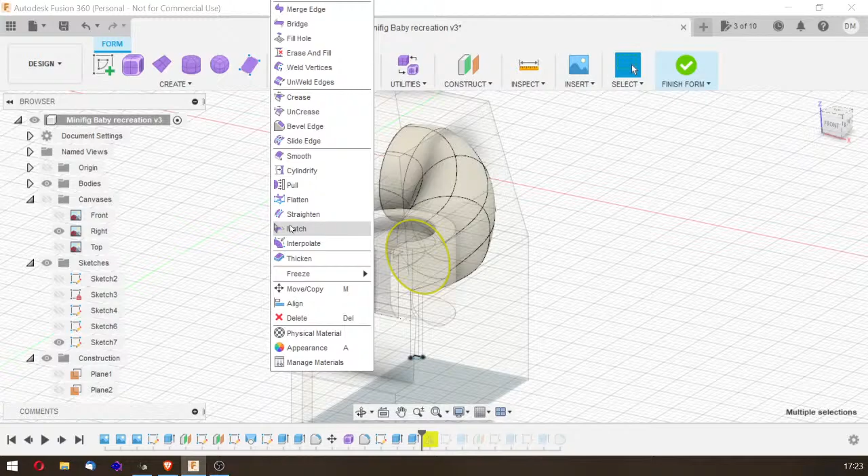Let me think, hold on a second. I guess it's one thing I forgot to do, and that is to close these holes up. So what I've got to do is, there was a tool, I forgot what it is - fill hole. Very straightforward.

So there's different ways of filling the hole, I guess, but what I wanted to do was preserve the shape as much as possible. Oops, no, that's not it. Deary me.

So yes, what I'm trying to do at the moment is - oops, that is not it - close these holes so we could have a solid shape essentially. There we go, I think that's it. Cool.

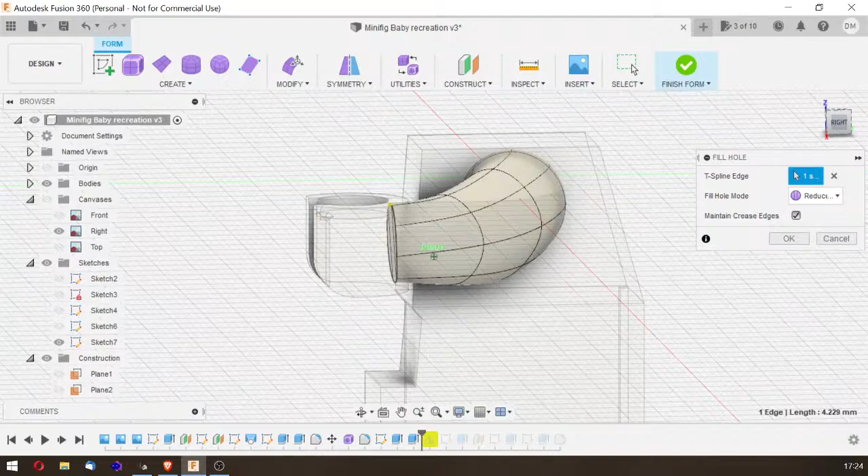We'll do the same for this side. Now I'd like to think that would enable us to - there we go - that will enable us to join these two shapes together, which is going to be essential for the next parts.

So what I'm going to do is create a component from those two, and that's going to be called an arm. I'll hide that leftover body. So this is the arm component, and I'll call it - this is the left hand arm, so I'll call it arm L. And let's see, if we really wanted to be extra, and I'm known for being extra...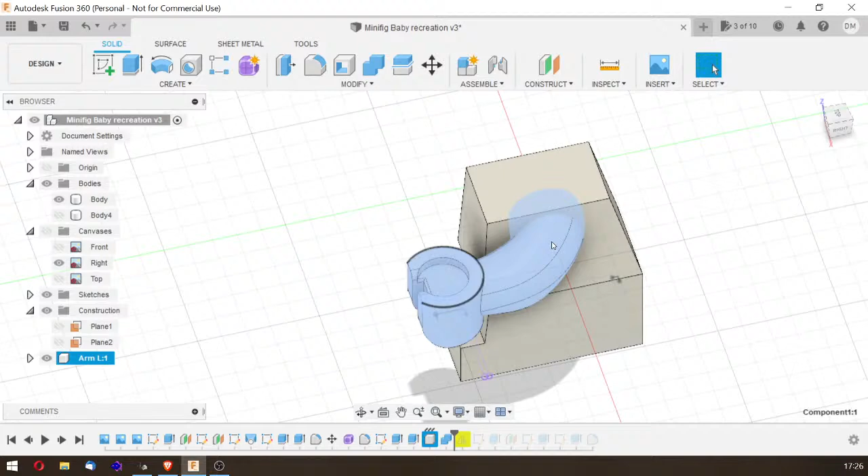What I could also do is have this arm as a separate element, so I could print the body and print the arm separately, and then just plug the arm into the body. So what I'd have to do is, first of all, subtract the body from the arm so it will slot into place, and then create a pin system so I can insert the arm into the body.

So what I'll do is subtract the body from the arm. Make sure I keep the tools.

So I've done that, and what we should have is a slightly modified arm. Technically, I can't even rotate this properly. Technically we should be able to piece the arm - see that cutout there? We should be able to print these separately and then piece the arm in an exact position relative to the body. But in order to do that, we will have to have a pin.

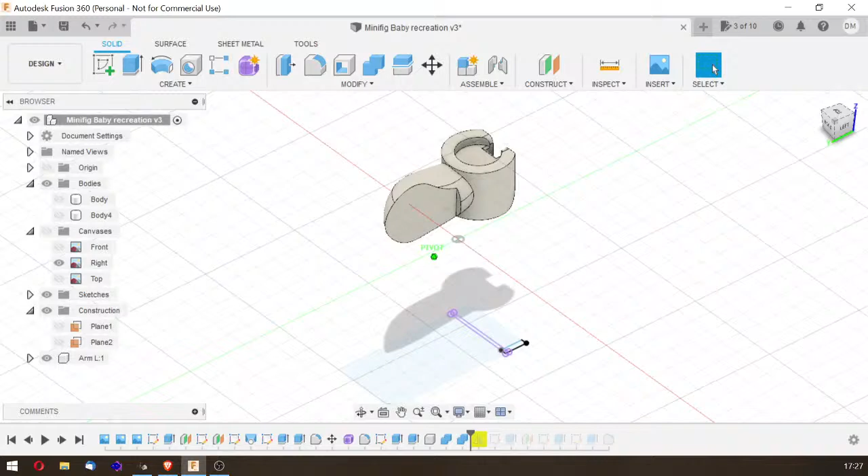So let's go back to the body. We will want to create a sketch on this plane. Let's show the body again, and let's just create a very simple pin here. Let's flip around to the left hand side just to make sure it's in the right spot. That seems okay. Maybe move it to a more secure location. There we go. Alright.

I think my problem, Bob, is that there's lots I try to do, and sometimes I actually do too much. I have to admit, sometimes I do way too much. And there's reasons for that, but I won't bore you guys with them.

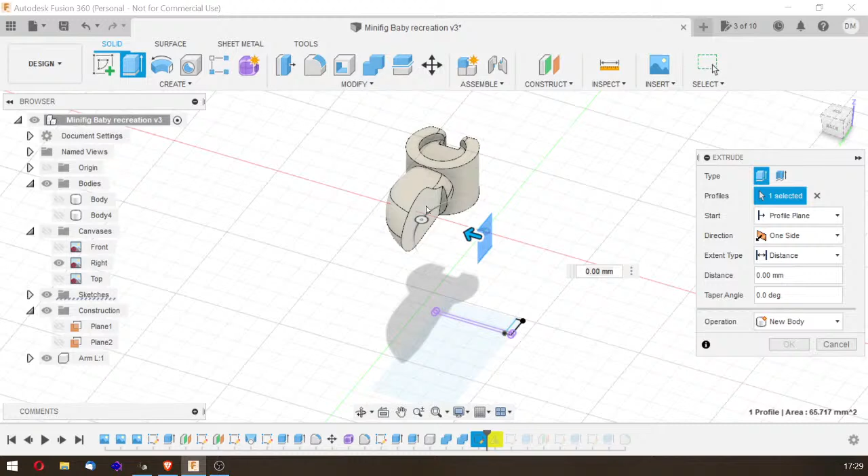So I'm just thinking at the moment, what I want to do is create the pin extending from the arm into the body. Oh, start from the objects. Excuse me. And then go. Okay, let me start again. Select this profile - you want to start from this object here. Excuse me. Alright, and then go this way. Okay. Again, this is a very crude way of creating a pin, but I think this will work.

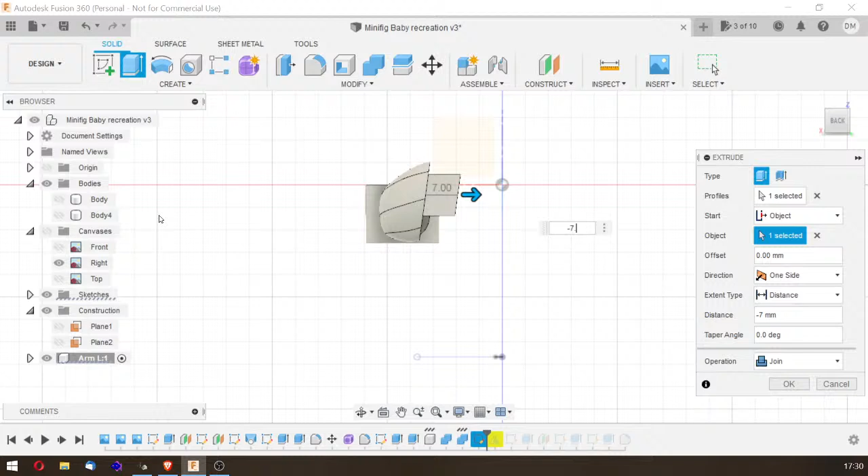Parts made for a tape deck. I think that's one of the problems you'll find in general, that people want the earth, but they want to pay you crumbs. I don't think a lot of people really know or have any inkling of how much it costs to do these things, especially with outdated equipment, which is a shame, really. But it's all about finding that balance, I guess. Finding the balance between how much something is worth to you versus how much you're willing to pay for it, if that makes any sense.

Okay, so created a pin for this arm, and we want to create a socket inside the body. So if we show the body, we want to create a hole in that body. So let's hide the arm for the time being, and we want to go back to that hole we created and do an extrusion. But instead of starting from there, we want to start from this section. I'm not sure if it's going to work actually, but let's give it a try. I think that does, yeah. I think that will work. Okay.

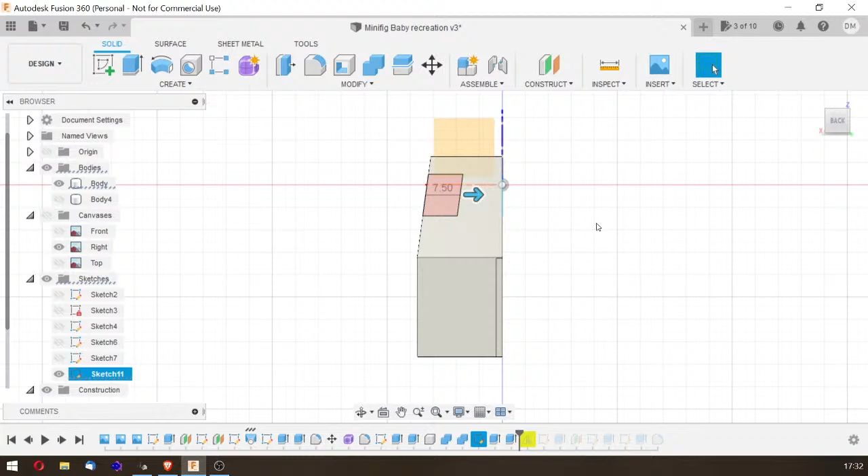So we created a hole, and technically the arm should be able to fit into that hole just like that. One thing to bear in mind though is that, especially with 3D printing, you've got to be aware of what's called tolerances. So printing something at, let's say, 10 centimeters won't necessarily produce an object that will be 10 centimeters. It may be a little bit larger or smaller.

So what we want to do here is essentially, not necessarily find out, but make the hole a little bit larger so that we can be assured that the parts, or the arm in this case, will fit. So what I've done is created a section analysis so I can see how the arm and the body intersect. We can see here that it's going to be a very tight fit, and even the world's most accurate 3D printer isn't going to be able to create a part from this that will fit exactly. So what we'll have to do is make the hole slightly larger.

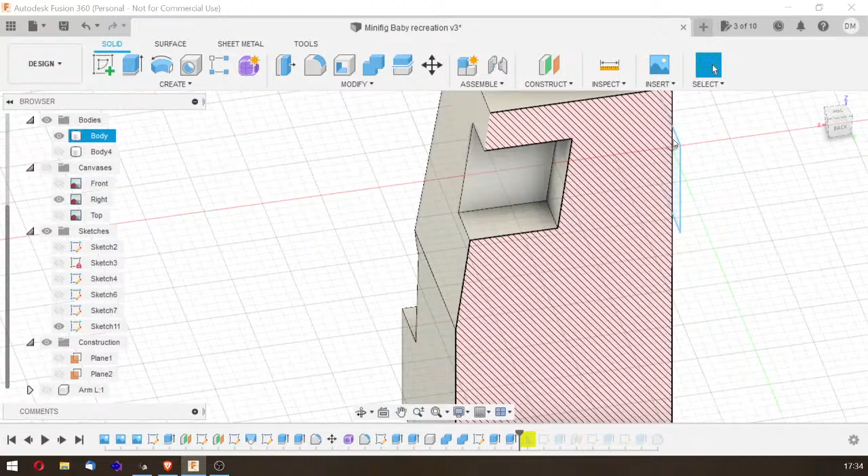So let's hide the arm, and then what I will do is - let's see what it is - I think it's offset face. Select these inside walls for the body. This one too, and I'm going to adjust it by my printer's tolerance, which is roughly 0.3 millimeters, minus 0.3 millimeters.

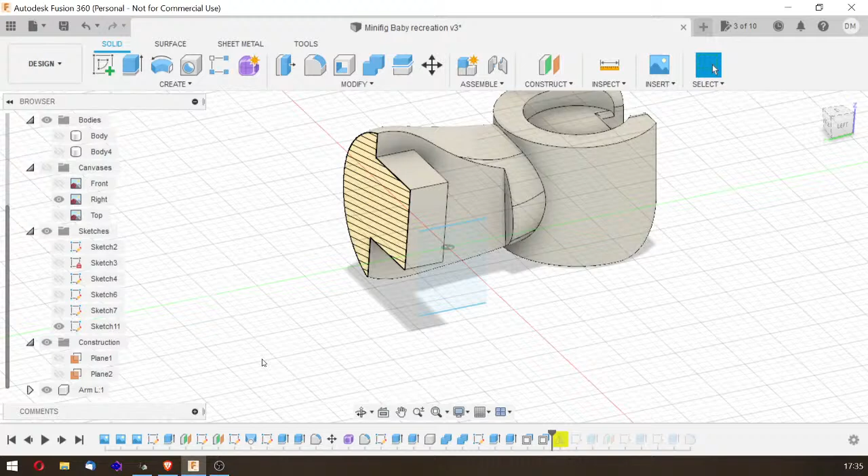So if you go back to our section analysis, you'll see that the hole is slightly larger. There's a gap between the arm and the body, at least inside the hole. So in theory, the arm should be able to fit, but we also want the tolerance for the place where the arm meets the body as well. So we'll do a very similar thing. Let's hide the body. So we'll do a very similar thing for the arm. Let's select this face and this face, and give them a tolerance of minus 0.3 millimeters. Which I think has worked.

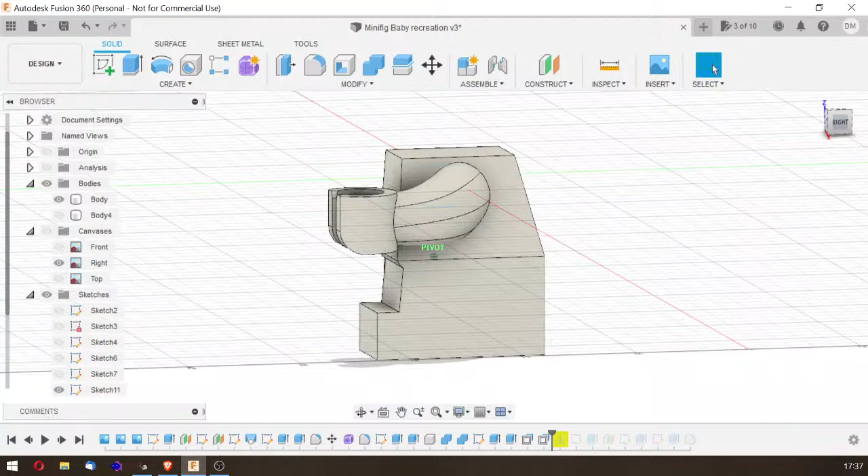Okay, let's get rid of this analysis, and that's what we have so far. So in theory we could print the body separately, print the arms separately, and piece them together, which should hopefully make it easier to paint the body and the arms. And of course we'll do the same thing with the head.

So if we go back to our full body, what we can do now is, because the arm is a separate component, modify this so only the body is mirrored, since the arm we can also duplicate by creating a mirror copy. And this is the right arm, so just call it arm R.

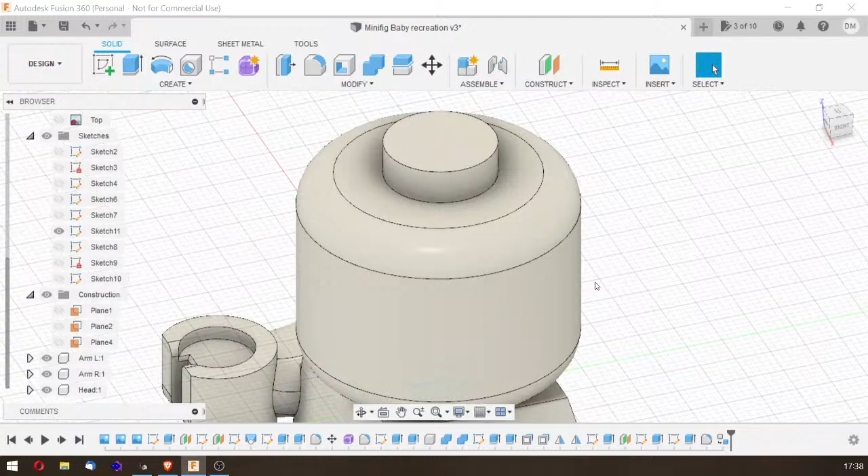Okay, so we can go all the way back to having created the head and the neck. We want to make this head able to attach to the body. So what we can do is, since we have the head as a separate body, create a component. We already have the neck bracket, so we can subtract the body from the head and keep the tools.

So if we hide the body, we can now see that the head has that cavity for the neck. And similarly, we want to make it a little bit larger so that when we print it, hopefully the parts will fit. So we'll give it the tolerance of 0.2 millimeters again, and hopefully that should be it.

Oh yes, and before I do anything else, I'm going to save. Just call it components.

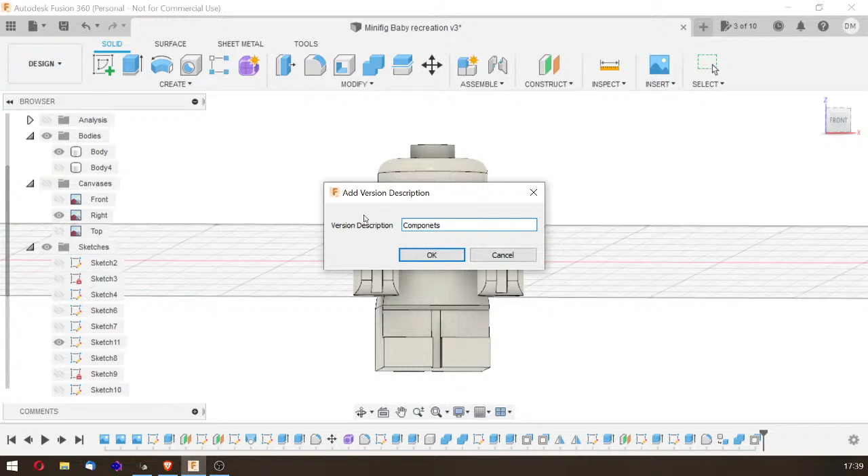Alright, and yeah, that's pretty much it for creating a minifigure baby. I guess the only things to do now is to go back and adjust a few things, have it to where I can easily modify things if I wanted to.

I suppose one last thing I could do is, since I created this, I could just put my logo on it. So one last very quick step. I'll go to my logos folder, and I will add this to the back of the baby, roughly in the center there.

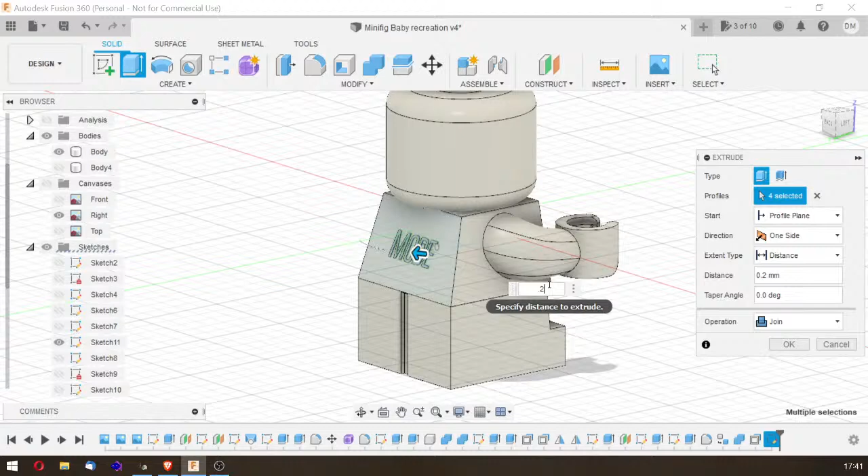And then perhaps a little extrusion to cut into the body. Or perhaps I should have it like this. Yeah, let's do it like that. Let's have an extrusion rather than an indent. Okay, so I want to say that is done.

That is what I'm going to call my minifigure baby model. And it's taken a while to get to this step, and if you're still watching, if you're still listening, give yourself a round of applause. But man, that was an ordeal.

So I guess the next thing for me to do is just to tinker with this to make it a little bit more customizable, and then I'll give it an attempt at a 3D print.

Bob is asking if I've had any trolls. Not on YouTube, thankfully, very much. I've had trolls in other areas, and I've had to deal with trolls before, but thankfully none to do with this live stream or with any of my videos in general. I have the innate ability to put people to sleep anyway, so by the time anyone thinks of trolling me, they'll have probably had a good night's kip. But yeah, I've not had any trolls, thankfully, not on YouTube, but other areas of the internet I have.